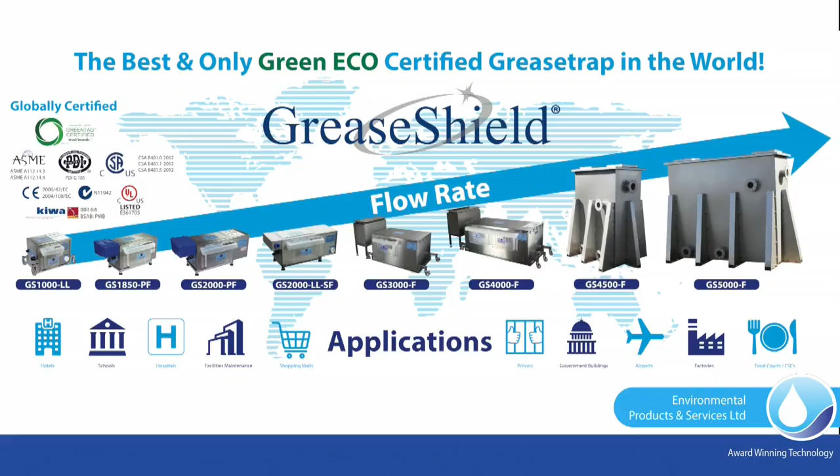EPAS, Environmental Products and Services Limited, produces a globally certified, award-winning range of grease management and food waste products, and additionally manufactures a range of plumbing components and filtration products.

18 international awards in the last 7 years is testimony to the innovative product range. EPAS does not sell boxes. We deliver efficient solutions resulting in our customers saving money, allowing them to concentrate on their core businesses.

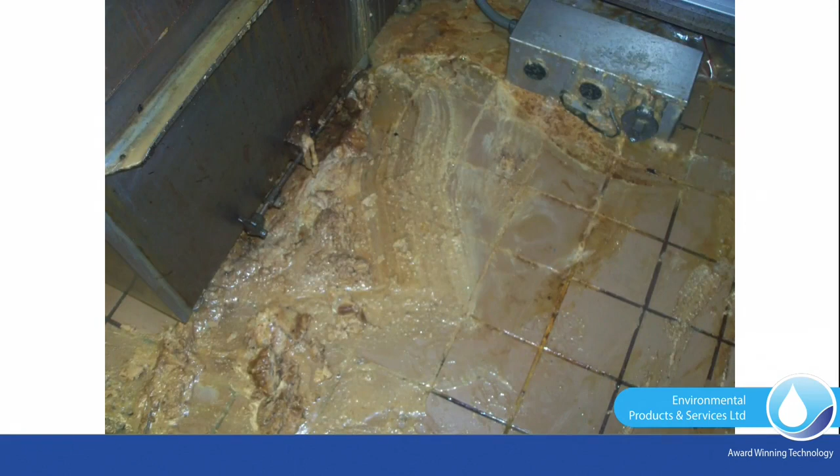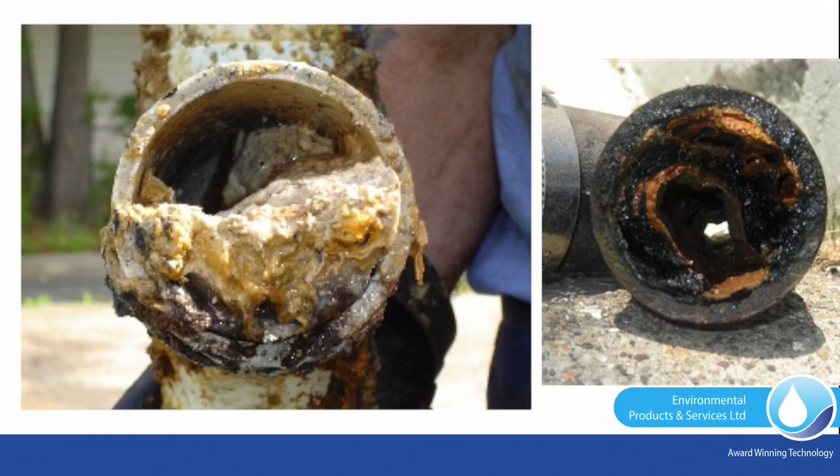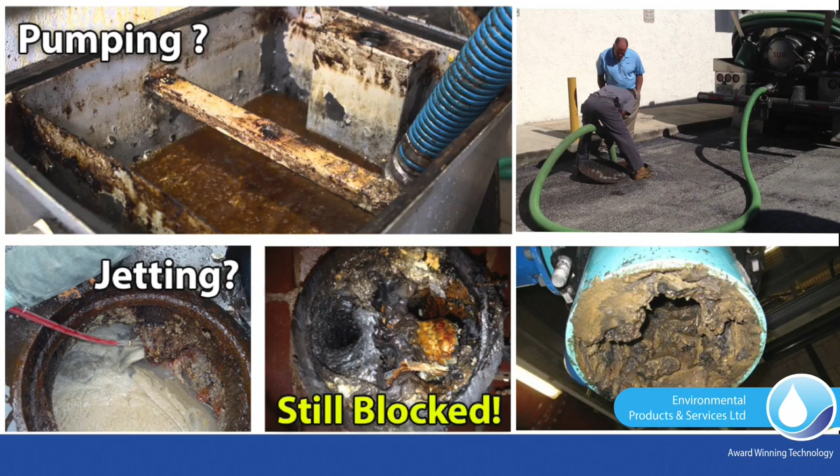Without having to worry about drainage problems caused by FOGs, fats, oils, and greases, and food waste that clog up the drainage system, requiring constant pumping of grease traps and jetting drain lines. Cost savings are achieved as a result of the innovative and patented solutions, which achieve efficiencies of up to 99.72%, protecting your drainage network, avoiding the reoccurring need to pump out grease traps and jet drain lines, and the need to use water, a precious resource, to refill those grease traps.

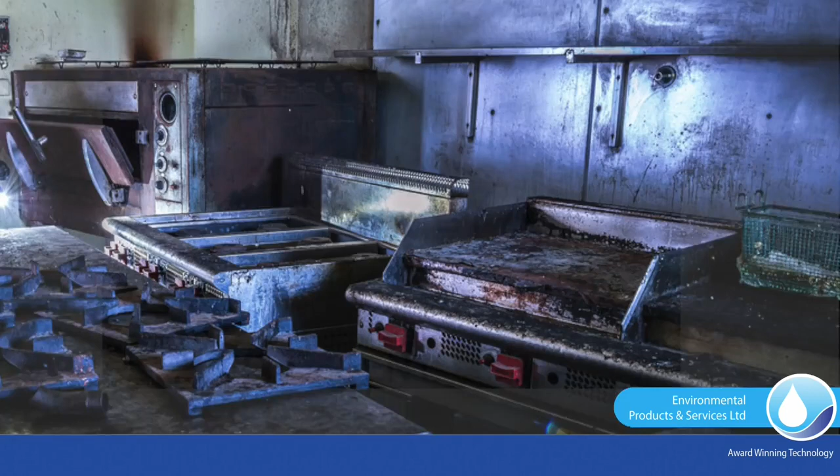Unlike other mechanical type grease traps, GreaseShields do not use heating elements, thus avoiding fire and smoke damage risks, in addition to saving on substantial energy and environmental costs. GreaseShield products present the opportunity for revenue generation by harvesting the fats, oils, and greases, a high calorific waste stream with applications in the renewable energy and pharmaceutical sectors. GreaseShield products protect the environment and meet code compliance requirements.

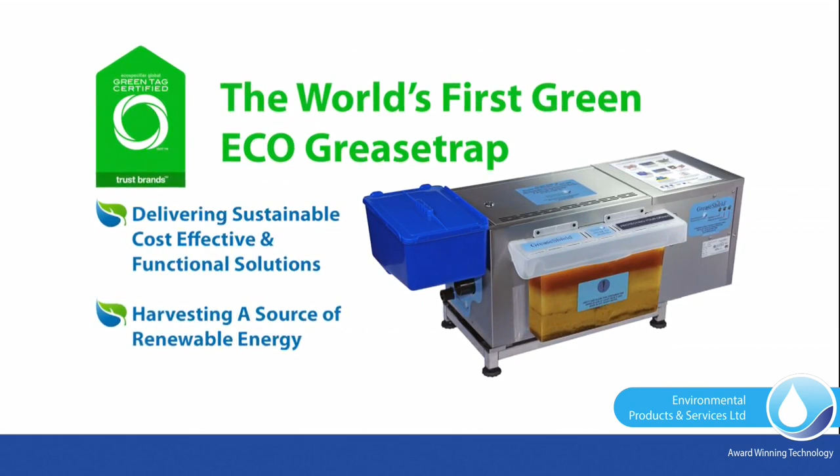GreaseShields remove emulsified fats, oils, and greases retained in the hot water discharge from dishwashers, combi ovens, pre-rinse, and pot wash sinks. The GreaseShield product range of 21 solutions are certified by Underwriters Laboratories, the Plumbing and Drainage Institute, the American Society of Mechanical Engineers, and the Canadian Standards Association. GreaseShield has the unique status of having attained Green Tag Global certification, the first and only grease trap in the world to achieve this standard.

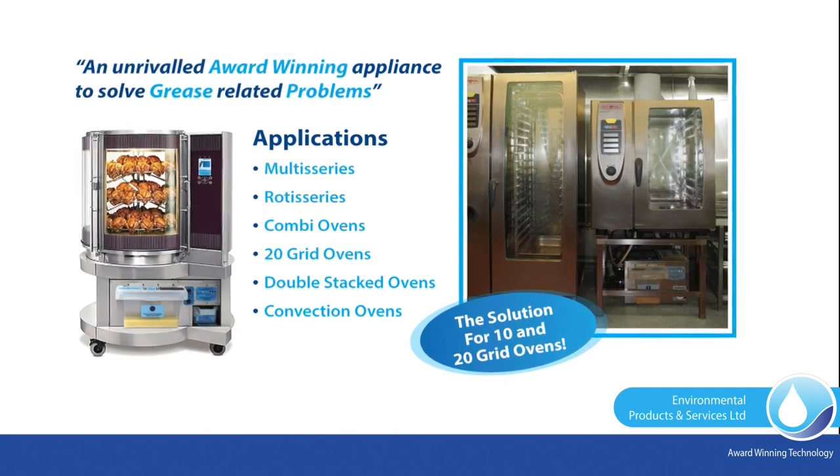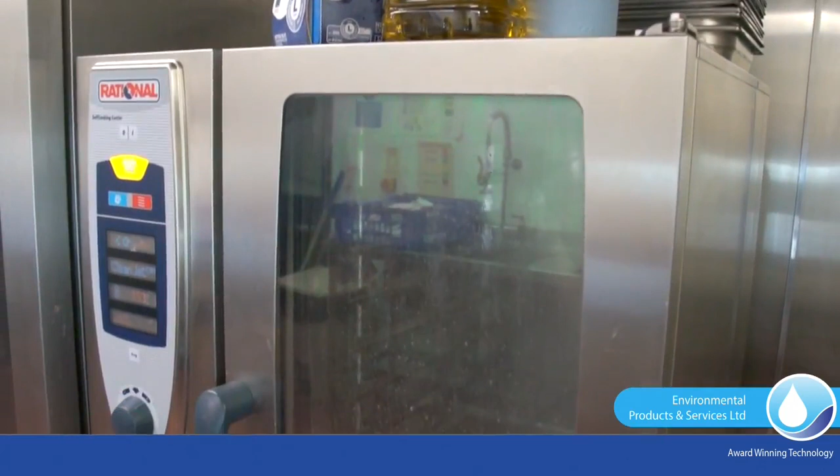One example of the award-winning innovative products is the GreaseShield low-level product, designed to interface with 20 grid and 10 grid ovens and deal with saturated fats, such as chicken and pork fats, which solidify when effluent temperatures fall below 86 degrees Fahrenheit. The absence of hot effluent flow in convection ovens creates more difficulties, as the fat discharge solidifies on contact with cooler effluent.

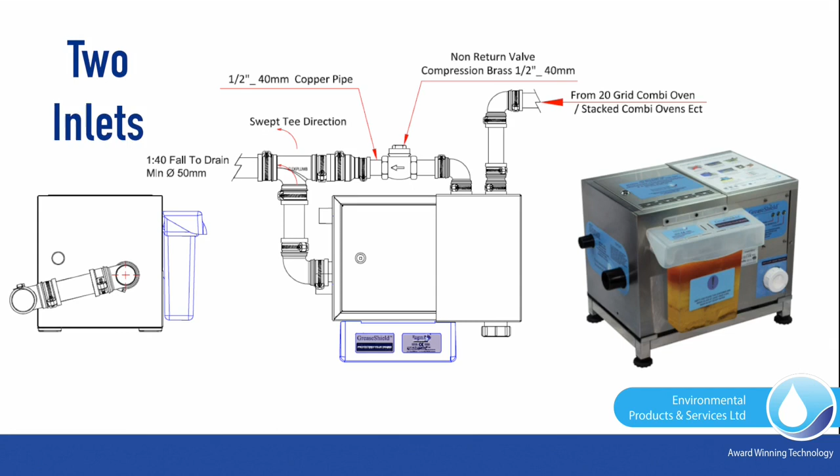The GreaseShield low-level range deals with low invert discharge points in combi ovens. 2 inlets are provided in the GreaseShield 1000 low-level product. The GreaseShield 1850 low-level has 3 inlets, allowing the potential to receive effluent from a 20 grid oven, a 10 grid oven, and from a nearby wash-up sink, that, for example, may be used to wash trays used in ovens.

The Good Life kitchen produces on average 5.5 US gallons of fat every day. In a year, that adds up to 1,400 gallons, or almost 5 tons of fat.

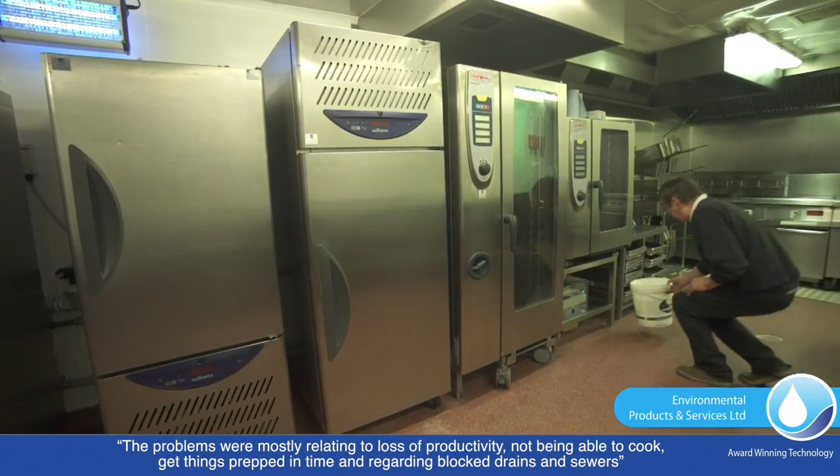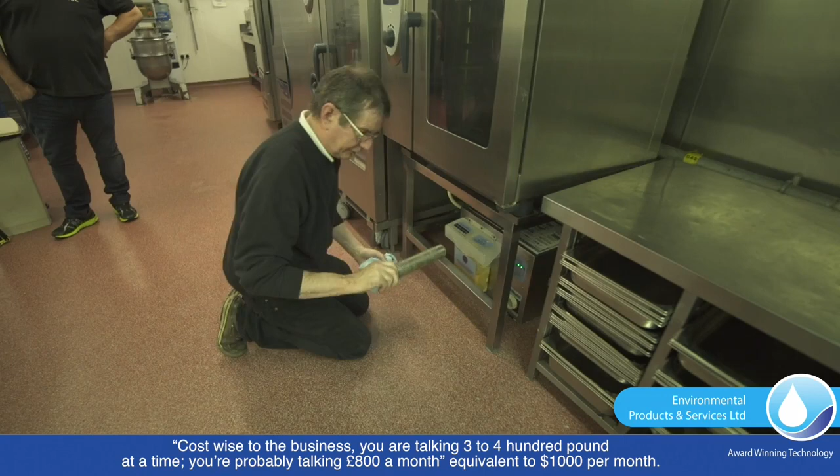A testimonial from Paul McGill, kitchen manager for the Good Life, states: The problems were mostly relating to loss of productivity, not being able to cook, get things prepared in time, and blocked drains and sewers. We go through, on a weekly basis, roughly 1 ton of cooked chicken fillets a week, 3 to 4 tons of potatoes. We weren't getting that out. Things were pretty hectic regarding consistently having to get people in to service drains and sewers, that sort of thing. Cost-wise, the business, you're talking about 300 to 400 pounds at a time. You're probably talking 800 pounds a month, equivalent to about $1,000 a month.

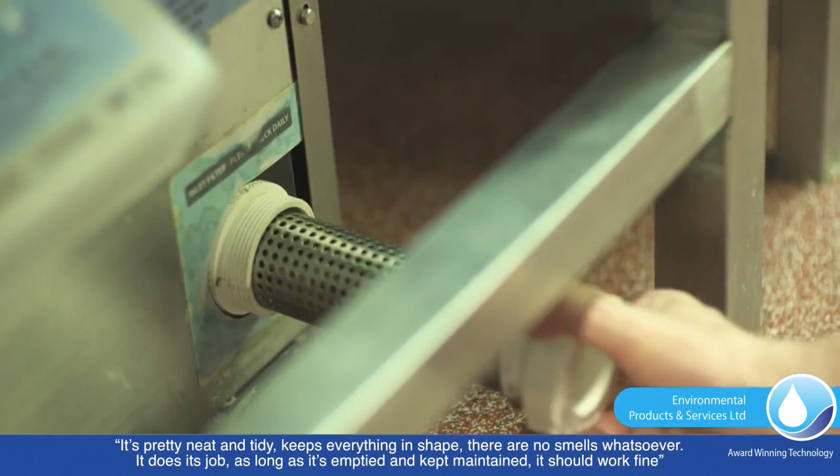It's pretty neat and tidy, keeps everything in shape. There are no smells whatsoever. It does its job. As long as it's emptied and kept maintained, it should work fine. I fully recommend it. I definitely would. It has worked for us from the word go. It does what it's meant to do, and we have had no problems.

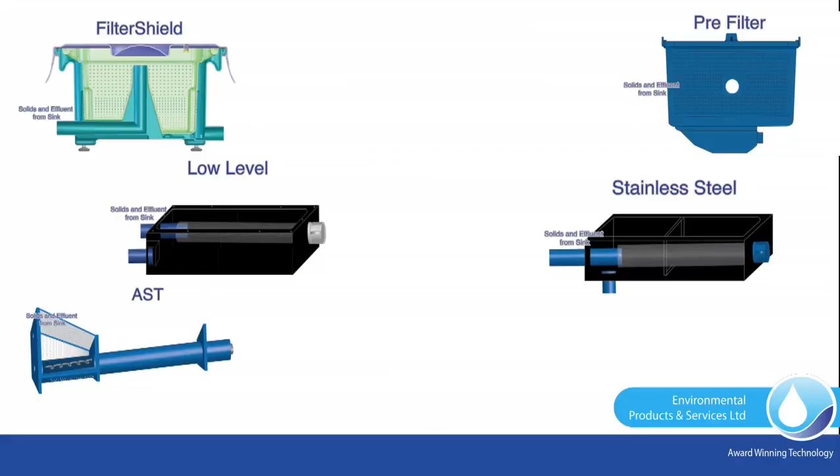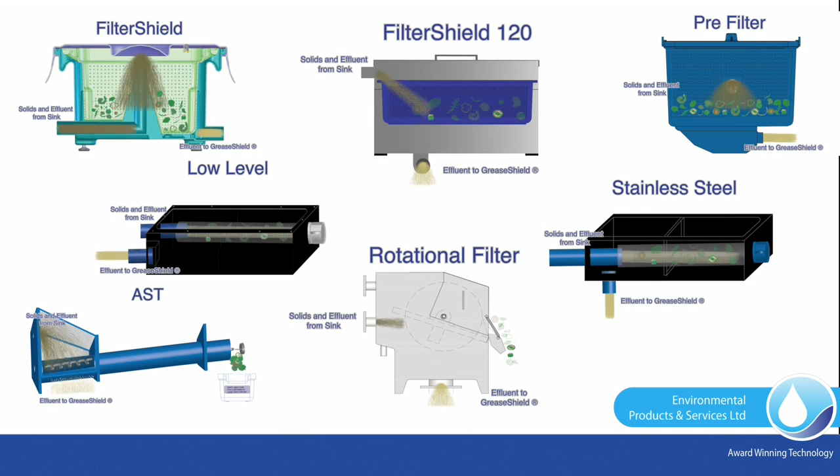It's very good. Solid organic food wastes are removed from the GreaseShield so as to prevent biological degradation and anaerobic conditions developing. The GreaseShield uses 7 unique solutions for removal of food waste using one of the unique filtration options: FilterShield, pre-filter, low-level filter, front-loading pre-filter, automatic solids transfer, and rotational filters.

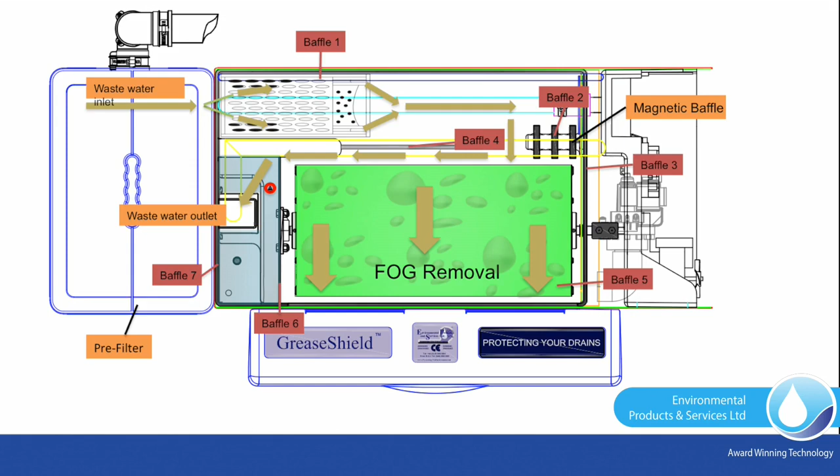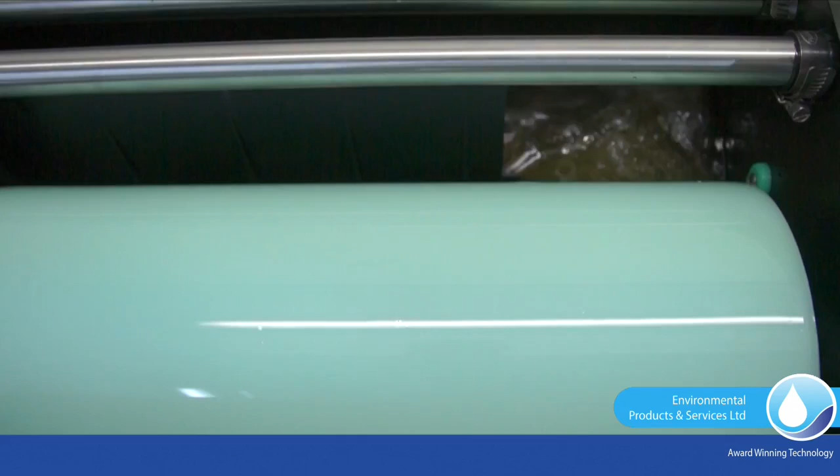The reverse flow configuration provides a compact footprint in which to achieve fat, oil, and grease separation, working in conjunction with multiple cooperating baffles and a magnetic baffle to prevent the discharge of emulsified fats, oils, and greases. Clean gray effluent is recycled to assist in the internal cleaning of the GreaseShield and to prevent dairy or floating waste sitting and biodegrading in water at temperatures of typically 95 to 104 degrees Fahrenheit.

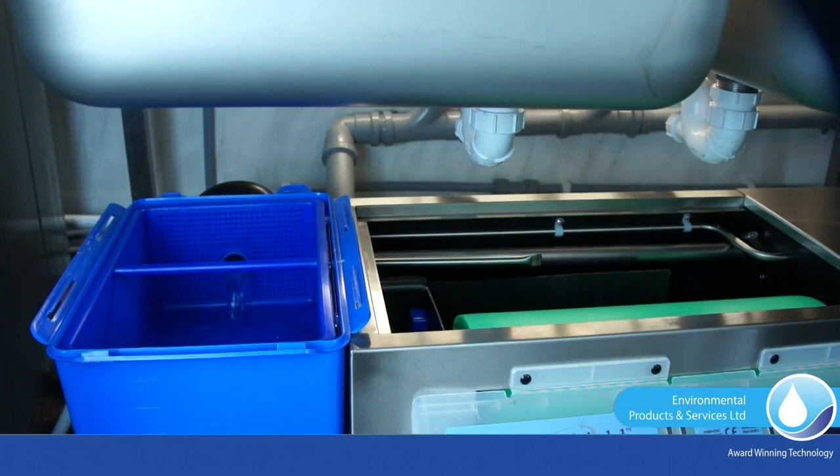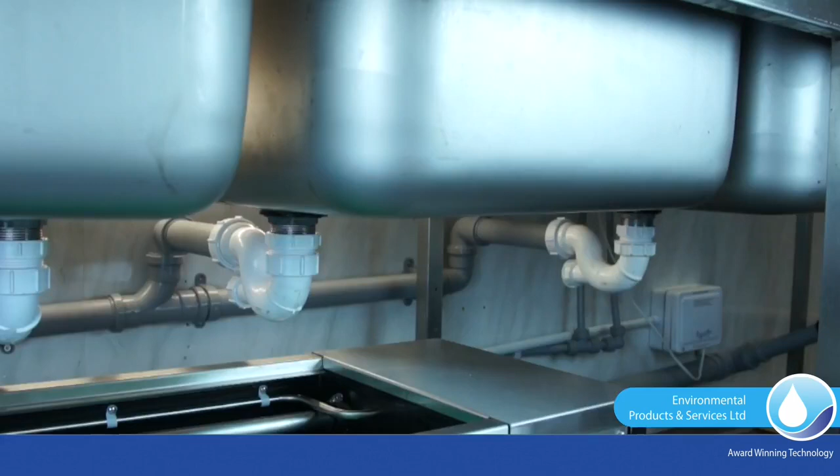Recirculation and pulsing the FOG removal process enhances FOG removal, and enables both dairy waste and FOGs to be removed. GreaseShield takes advantage of the difference in specific gravities of FOGs and water, and the waste thermal energy present in effluent being discharged from kitchens to remove FOGs and saturated fats before solidification. The FOG removal is enhanced by creating a whirlpool effect and recirculating gray effluent.

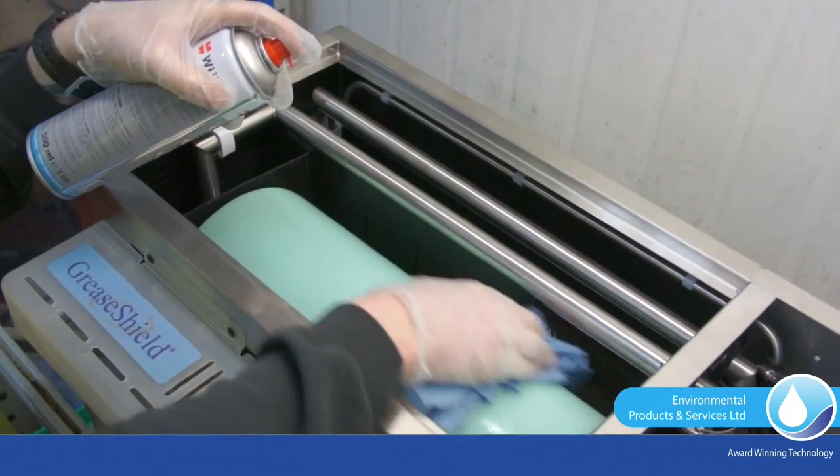The FOG removal means comprises an oleophilic and hydrophobic roller which attracts FOGs and repels water, working in cooperation with a long-lasting wiper blade having anti-static properties. No maintenance is required for the FOG roller, but if it is touched by hand, then it must be cleaned down with washing up liquid and a damp cloth.

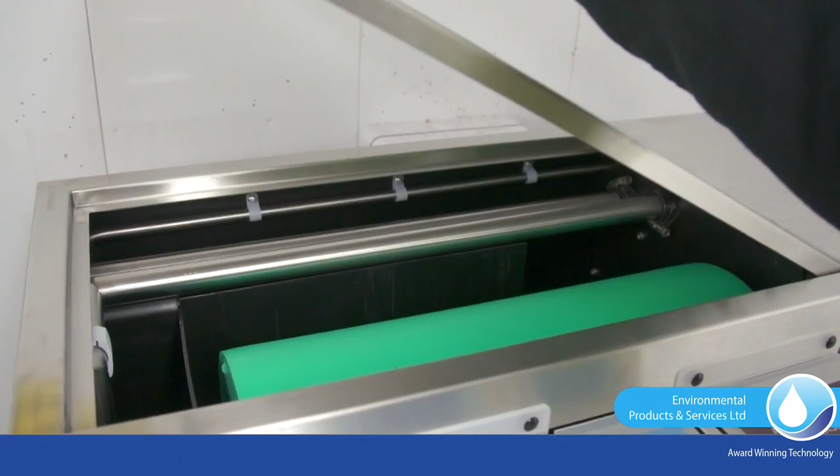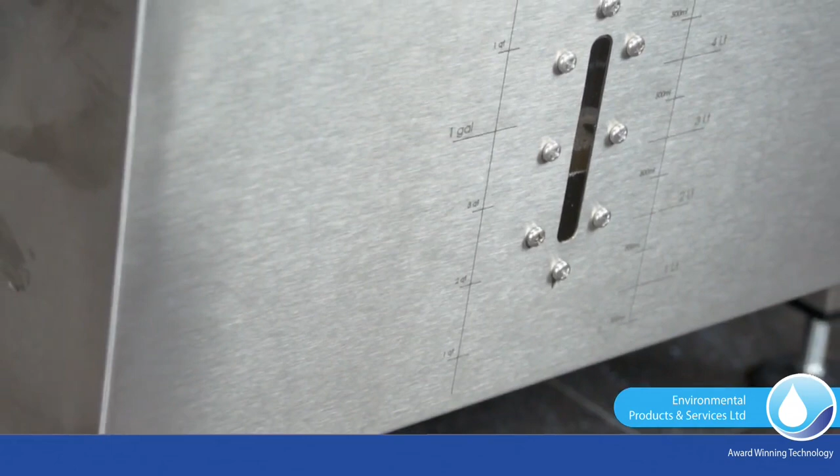Simplicity of operation removes the need for staff to access the internal workings of the unit or for the GreaseShield unit to be pumped out. The FOG cartridge, now available in durable polycarbonate or 304 stainless steel, is graduated to enable a record to be maintained for how much FOG is being removed daily. The FOG cartridge and pre-filter or solids cartridge or filter shield or inline cartridges should be emptied and washed daily.

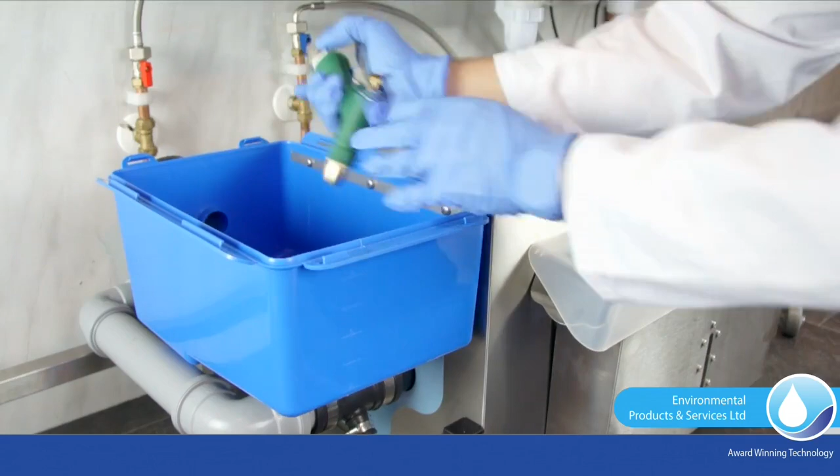A spray hose is supplied to assist kitchen staff to carry out daily maintenance. A daily maintenance log is provided with each GreaseShield. All GreaseShields are controlled by a PLC, allowing the units to work 24/7. GreaseShields work while the kitchen is working.

The standard operating program calls for the FOG removal means to pulse on for 5 minutes from 7 a.m. in the morning to 2:30 a.m. the following morning, but can be set to work 24/7. The recirculation feature activates for 10 seconds in every 90 seconds during FOG removal operations.

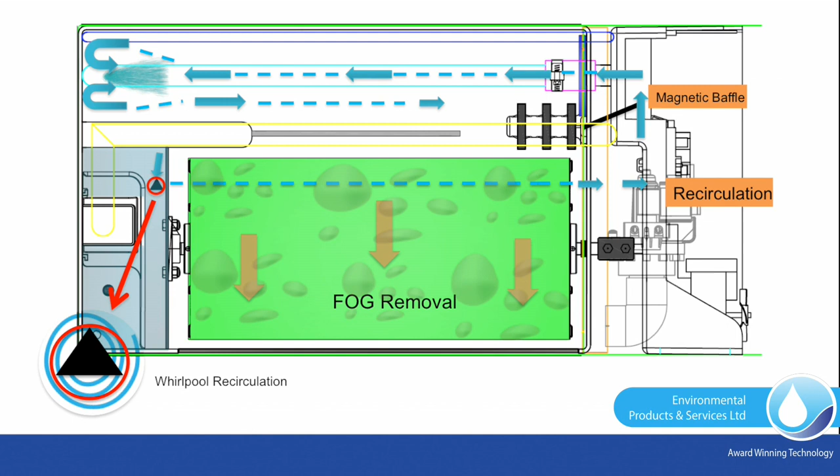LED lights indicate visually main power to the GreaseShield unit, another for FOG removal, and a third indicates the recirculation function and transfer of FOGs from one level tank or two bunded FOG storage tanks.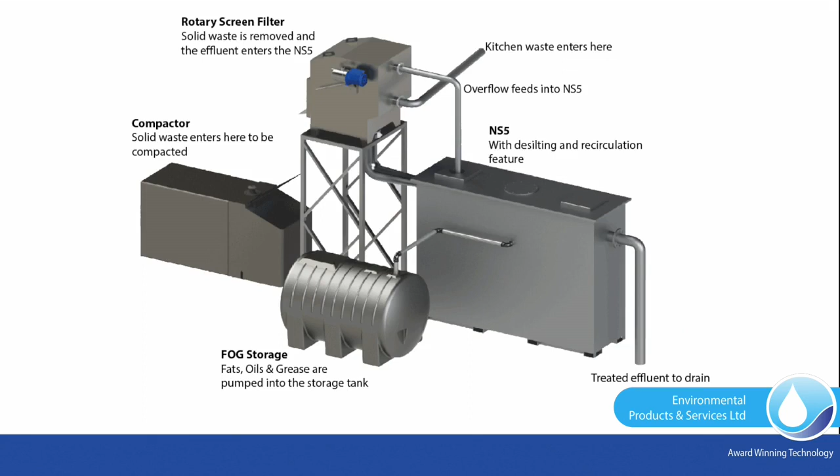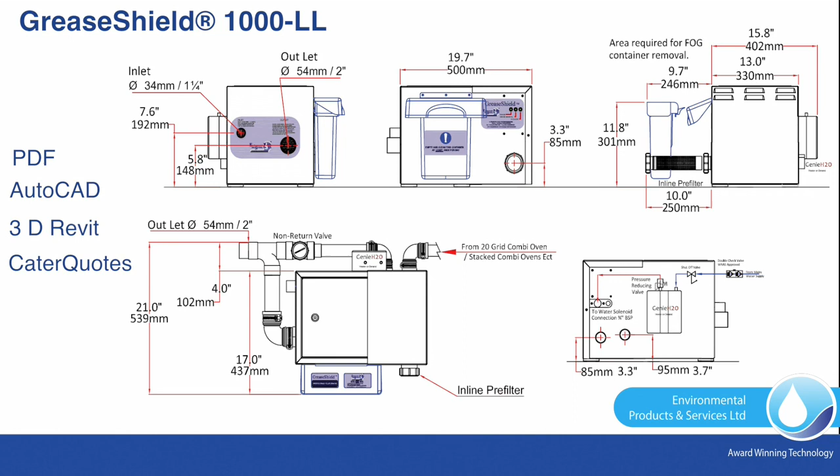Bolt-ons enable GreaseShields to handle floor drains and combined flows in multiples of 1.32 gallons per second. PDF, AutoCAD, and 3D Revit drawings are available to architects, hydraulic engineers, kitchen designers, facilities maintenance staff, multiples, plumbers, and catering equipment distributors. Free technical support is available in respect of sizing, selection, and mechanical, electrical, and plumbing requirements, further supported by technical and training videos.

The award-winning and globally certified GreaseShield delivers sustainable, cost-effective solutions whilst harvesting a source of renewable energy and saving you money. Don't let money go down the drain.